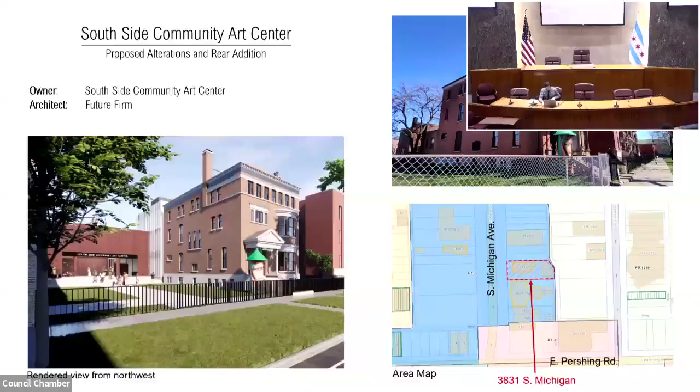The Seaverns family only owned the property for a few years. It then changed hands a number of times. It was acquired by the SSCAC organization in 1940, which did not have facilities of its own until that point. The mansion was adapted for the Art Center as part of a Works Progress Administration initiative that established many such art centers around the country near the end of the Great Depression. This is the only one of these art centers that is still active today.

During the 1940 conversion, a portion of the main building's interior was renovated by Hin Bredendieck and Nathan Lerner, two students of Laszlo Moholy-Nagy, director of the short-lived New Bauhaus Design School in Chicago. The first-floor gallery, now known as the Burroughs Gallery, the reception area, and the stairs connecting the first and second floors were part of this interior renovation and are the interior designated spaces. Their design was radical and forward-looking for its time. This was appropriate for the SSCAC, as it was one of the first arts institutions to host exhibitions and programming for artists of all racial and economic backgrounds together, at a time when the rest of the art world was still largely segregated.

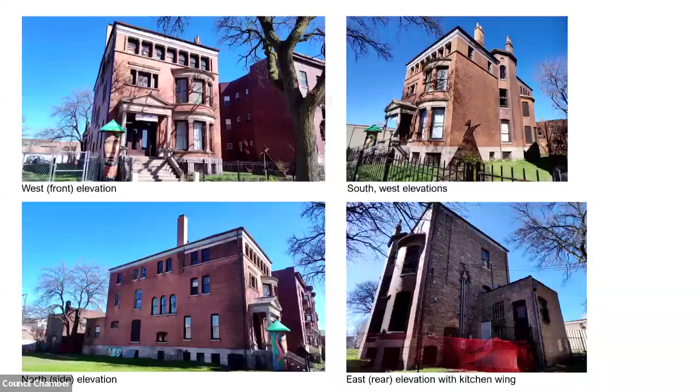All elevations and roof lines of the building are significant features of the exterior, which mostly retains its original 1892 appearance. The building is clad in face brick with a limestone base on the front and both side elevations, and has a hipped roof with little overhang. Limestone trim and classical details feature heavily on the front facade. A decorative pressed metal cornice ran around the entire perimeter of the roof, though at some point this was replaced with a simpler flat one.

On the north and south elevations, some windows have been covered. The windows at the first floor gallery were covered when it was converted in 1940, but the other non-historic infill is proposed to be removed.

At some locations, windows beneath the infill will be repaired and restored. Where windows are missing and at the lower level where they are deteriorated, they are proposed to be replaced. Details of the new metal cornice and replacement windows should be provided with the permit drawings. In addition, the roof is proposed to be replaced like for like, and tuck pointing and other masonry repairs are proposed at all elevations.

The Art Center is proposing significant interior alterations and an addition to the building, creating new galleries, meeting rooms, archives, support, and other spaces. MEP upgrades will allow the existing spaces to better conserve artwork and artifacts in the center's collection. A new rear addition is proposed for the rear of the site, outlined in red.

The designation ordinance covers the original boundary of the subject lot, highlighted here in blue. The two lots to the north of the property have been acquired by SSCAC and will be combined with the subject lot, allowing the addition to extend further north than the existing property line.

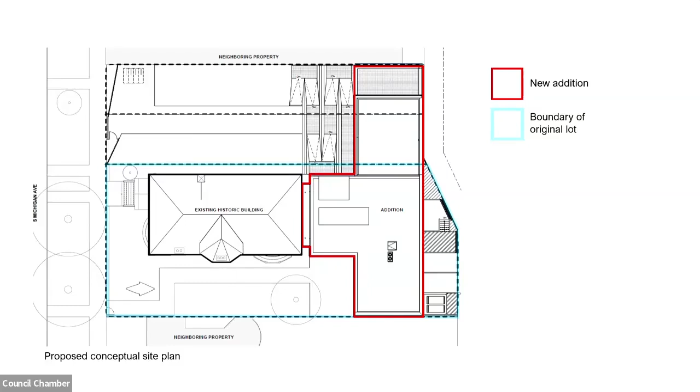The majority of the interior on the lower level, second and third floors is proposed to be demolished to allow reconfiguration of spaces. The designated interior spaces on the first floor, the gallery, reception area, and the two-story stair, will be preserved with some minor changes.

The existing coach house at the rear of the property is proposed to be demolished, which was reviewed and approved by the committee at the May 2024 meeting.

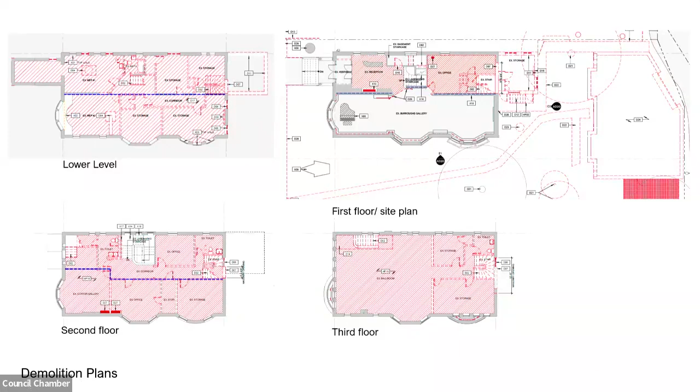On the interior, the first floor Burroughs Gallery and reception area are lined with the original pine paneling that was installed in 1940. The applicants believe the pine paneling was stained a darker color at some point and has not simply darkened with age. They propose to chemically remove the stain and use a lightening agent to lighten the wood. Tests of multiple agents are proposed to determine the best method for removing the stain and lightening the planks.

Because there's no documentation that the paneling was stained, staff recommends a test first to determine whether any stain can be removed. If stain cannot be removed and the wood has simply darkened over time, the paneling should not be chemically lightened.

The floor of the Burroughs Gallery and the stair treads and risers were painted at some point, and tile was installed over the original floor of the reception area. The tile and paint are proposed to be carefully removed and the wood flooring refinished and returned to its natural color. Neither the tile nor paint are historic, and the removal will restore the historic condition of the floors.

In these areas, if removal of the paint or tile reveals any flooring that is deteriorated beyond repair, it should be replaced with flooring matching the original in type, wood species, width of planks, and height of the finished floor.

As part of the renovation, additional insulation is proposed to be added to the exterior walls to increase the building's thermal performance, which will require the pine paneling to be temporarily removed in the process. The planks will be carefully numbered and cataloged so they can be reinstalled in the same locations and orientation.

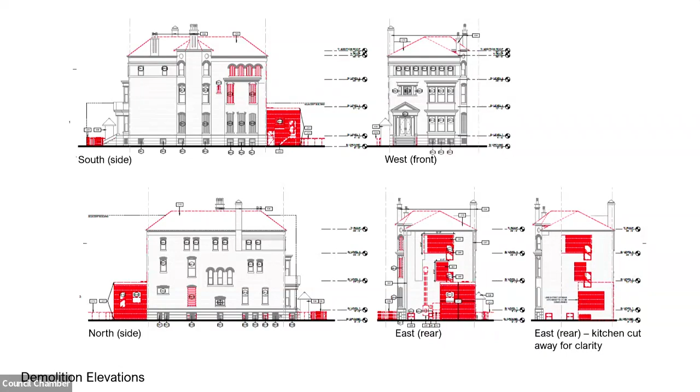At the rear elevation of the main building, where the new addition is proposed to attach, the small kitchen wing and some windows and areas of masonry are proposed to be demolished, as shown here in red.

The proposed new addition itself is located at the very back of the lot so that the main building is entirely in the foreground. The section of the proposed addition extending north of the main building is 2 stories and contains the new fully accessible main entrance, accessed by a combined ramp, stairs, and larger outdoor porch. The rest of the addition behind the main building and to the south is 3 stories in height.

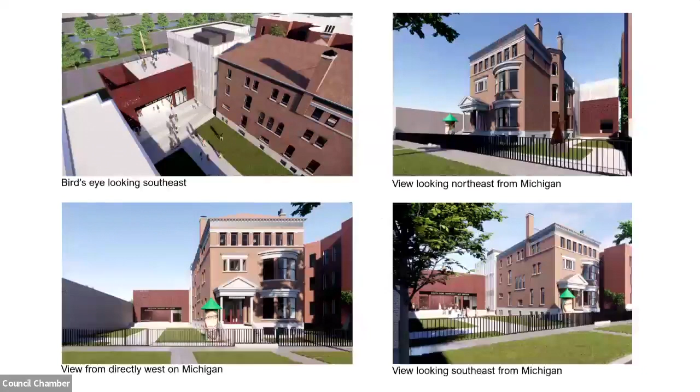The lower two-story portion of the addition is proposed to be clad in rain screen panels, and the three-story section immediately behind the main building clad in a glass curtain wall system. The south portion would be clad in a combination of both, with the panels at the first 2 stories and glazing above at the third.

The north porch at the entrance is a light-colored concrete, but an exact specification has not been made. A new simple metal fence is proposed along the front of the property.

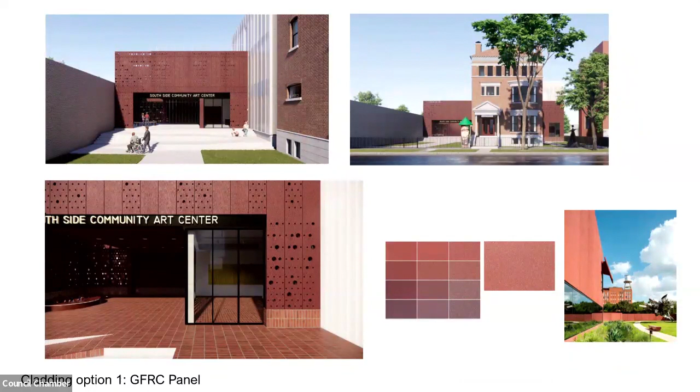At the portions of the addition that are to use the rain screen system, the cladding material has not yet been selected, pending confirmation of pricing, lead times, and other factors. However, it has been narrowed down to 3 options, one of which will be used.

One option is GFRC panels with perforations creating a pattern. The masonry-like material would complement the brick and limestone of the main building.

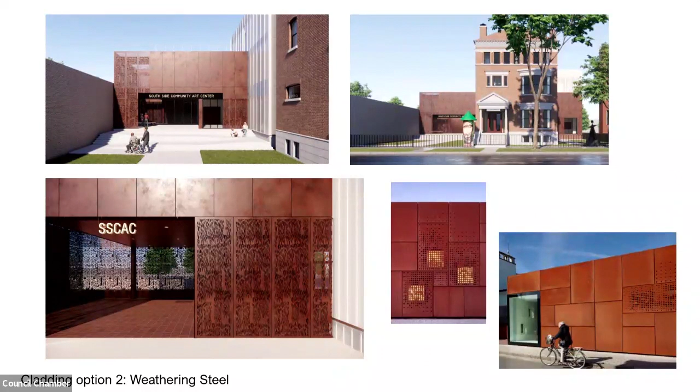Another option is weathering steel, also with a perforated pattern. This would stay within the palette of colors present on the main building and reference the pressed metal cornice.

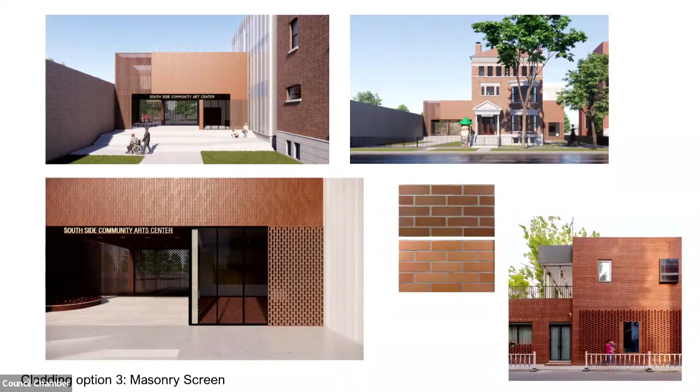The third option is a masonry screen composed of both solid and breeze block type units. This also has a direct reference to both the colors and masonry materials of the historic building.

Staff believes all 3 options are compatible with the historic building. Whichever one is ultimately selected, specifications and details should be provided on the permit drawings.

The curtain wall cladding a portion of the addition is proposed to be by Kawneer with captured vertical mullions that are proud of the glazing and expressed on the exterior. At the hyphen connection between the addition and historic building, the glazing is proposed to be clear vision glass.

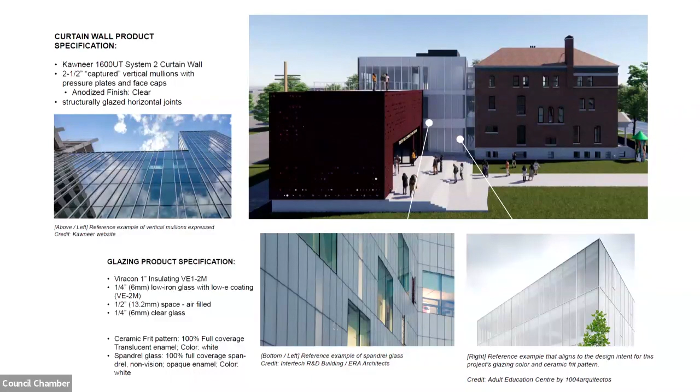At the remainder, the curtain wall would be semi-translucent frosted glass by Viracon. At the spandrels for each floor level, opaque white spandrel glass is proposed.

Staff recommends approval of the project as proposed with these conditions. Alderman Dowell has reviewed the proposal and has issued a letter of support. The applicants are here and available to answer your questions. We have the owner's representative, representatives of South Side Community Art Center, and the architect here.

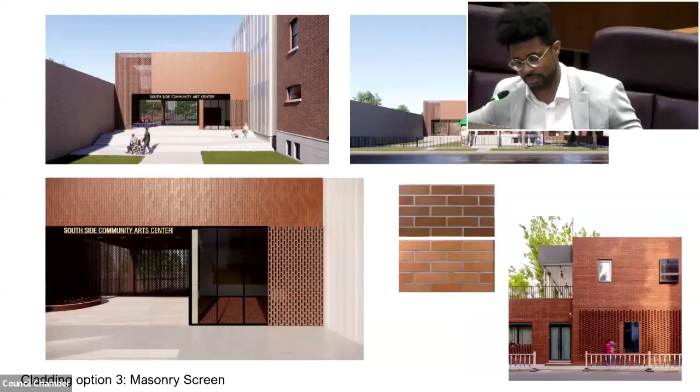So that's super tiny. I think what's interesting are the three options for the screen for the expansion. And I think, color palette wise, you guys have got it right on the head. I would imagine there's a lot of factors that will play into a final decision on that. But I would just encourage thinking of long-term maintainability. The only thing that jumped out to me is with the weathered steel, you've got everything that comes with weathered steel and what that may mean for the site. So I would offer that, but otherwise I think it's excellent work that's been done.

Good comment. I did have a couple of questions. One of them was regarding the interior panels at the ceiling, it goes up to the acoustical ceiling.

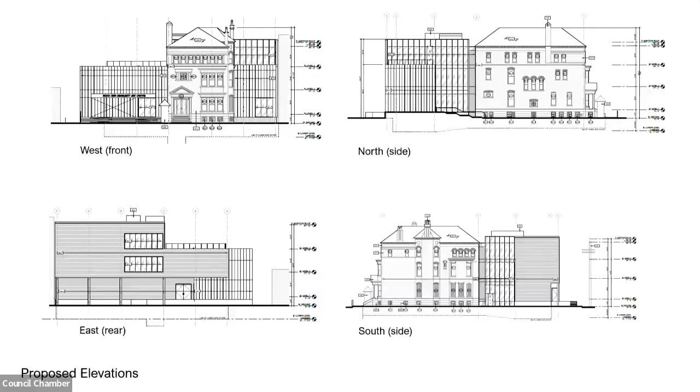Now that you're going to do this floating ceiling, how is that going to meet? Or, have you know, what's beyond the acoustical ceiling?

So we did some preliminary exploratory demo to understand what is above the non-historic ACT ceiling, and we see the exposed joist, so there's not another finished ceiling located above there. We're going to do a kind of cove detail between the drywall and the Burroughs Gallery panels in order to create a downlight around the perimeter of the gallery, which will reflect the original Bauhaus ceiling from the 40s renovation, but in a new material that I think will be more cleanable and more flexible for AV lighting and other gallery requirements.

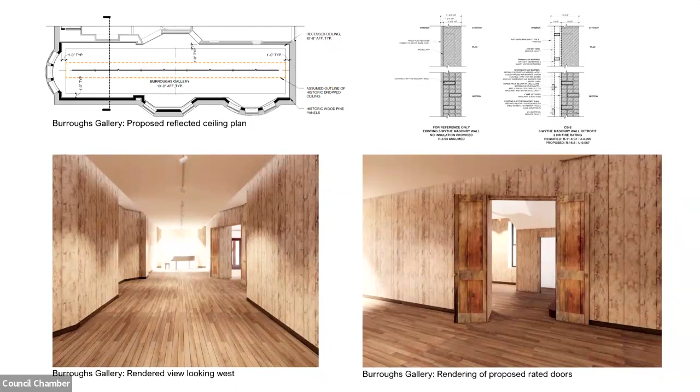Great, the second question I had was the schedule, you could talk about that. I can answer the question with regard to schedule, but if it's okay with you, I want to address the electrical outlet question first, because there's also a larger point at play that I failed to mention, so I apologize. Part of what we're doing here will also include significant environmental sustainability provisions as well as economic sustainability provisions.

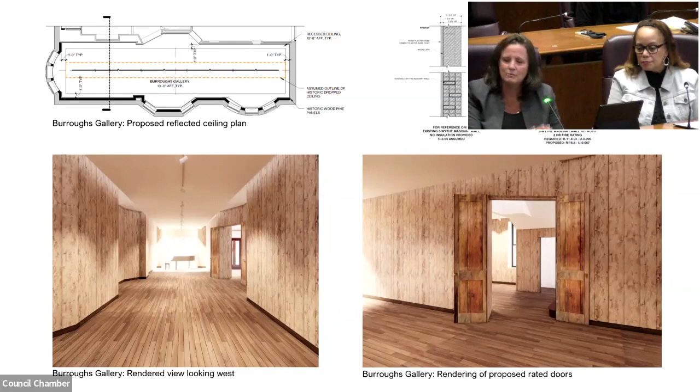The environmental sustainability provisions include a geothermal well system, and why we believe that's important is not only for the long-term operations of the facility, it also allows us to have unfettered ceiling heights and reduce the amount of ductwork that's going to go through the historic building. So as you're thinking about wire management and making sure we're concealing a lot of that, as it would potentially decrease the historic significance of something, we're thinking the same way mechanically.

I wanted to make sure to share that with you, Commissioner, because we're doing a lot of work with that. This is a project that has funding from community reinvestment, from DCEO, from the Illinois Arts Council, and ComEd has committed to some funding as well. So we're working through a number of those items, and that will ultimately determine the systems and final purchases.

Part of why you're being asked to allow us to continue to explore three facade options is specific to that funding and the fundraising. Monique and the entire board have done a remarkable job in garnering the funding and continue to bolster that funding, so we're really hopeful we can continue to push and afford more and more.

But one of the bigger schedule implications is that one of our grants does sunset, and it's over $2 million. So our schedule has, I wouldn't say complicated, but a nonlinear approach to it. So forgive me if I don't sound fully step-by-step.

But what we're doing right now is we've completed our design development package, we've had a cost estimate done by a third-party estimator, and we've begun discussions with all of the city departments as it relates to regulatory approvals - as I mentioned, fire department, MOPD and others, building department - so that we're well poised and don't lose the funding we've received from the Illinois Arts Council.

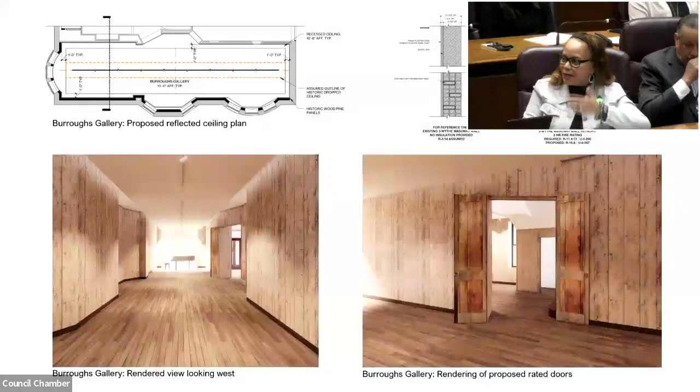So that's not only super exciting, and to the credit of the wonderful team at Future Firm, some of the pieces you asked about, the first three options, the idea was to somehow tie that historic information to the outside. So it won't necessarily be known when you first see it, but that was really kind of the concept.

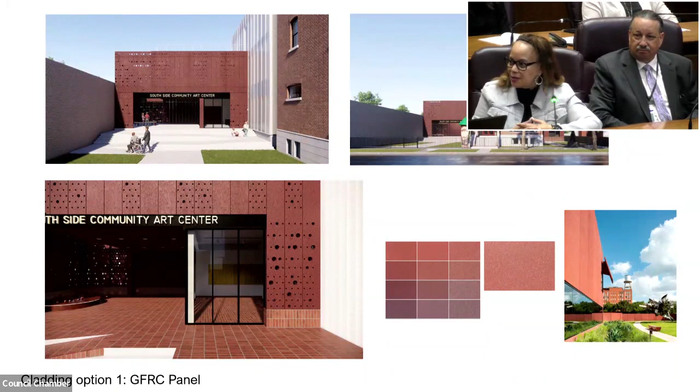And when Tyler mentioned, and everyone else has mentioned, just how much effort has been put into maintaining the cultural significance and the history, that's another component. I think we all got excited about that because telling that story, understanding all the artists who have come through those doors, and replicating that significance outside in some form or fashion was really exciting. So I wanted to mention that as we embark on choosing which of those three facades will work best for us.

I don't want to take up too much time, but I did see that note, and I know the process of exhibiting work and what that means for an artist is a science in itself. So, not to influence the final solution, but that definitely helps sell the GFRC for that. So, kudos again.

Worth saying we're looking at the custom full perforation also in the weathering steel as well. So the rendering you saw was an early study where we were looking at etchings by Margaret Burroughs, but we do think the hole pattern, which really resonates, as Monique mentioned, with the history of the institution, would also be applied in the weathering steel system.

Commissioner Hughes? Yes, first and foremost, I absolutely love this building. We live very close by, and I'm excited to take my little one to visit someday soon.

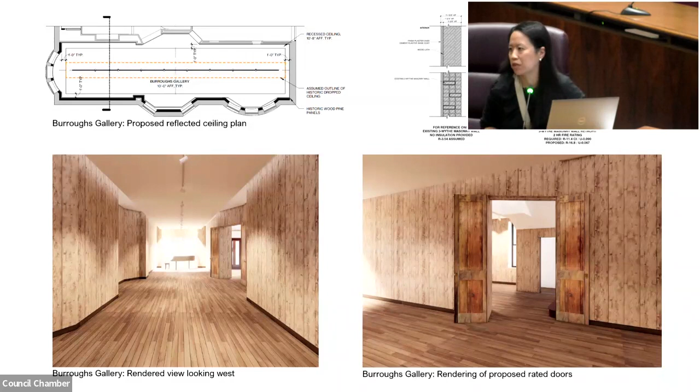Perfect, I'm super excited. I also think the rendering of the three different facades, and the courtyard that's in front of it, also seems like a really exciting space that I'm excited for. I can imagine our children and our community having a camaraderie moment in that space, and I look forward to the finish line of this and getting out to support some more.

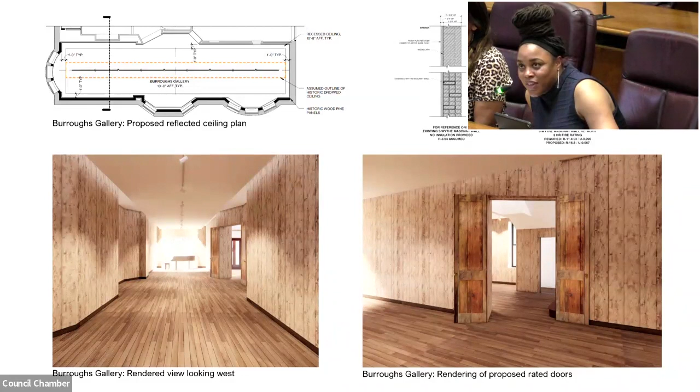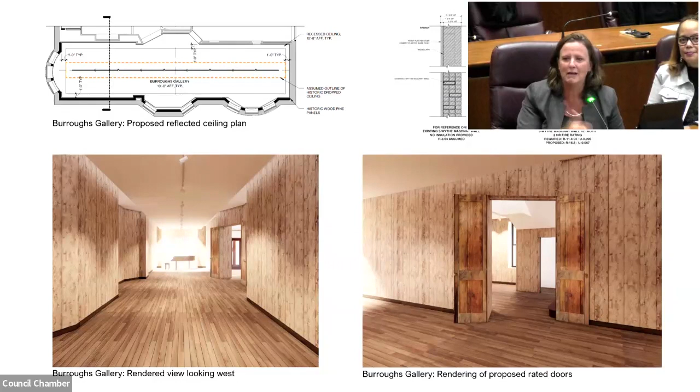Because that makes me really excited too. We've really ideated a lot around that convening space and the ability for the addition to serve not only as this amazing place that will have elevators and access, but humidity control for art storage for the very first time in the center's history. But part of how that addition is laid out allows for an open platform for spoken word assemblies or any kind of presentation or sculptural exhibitions that are sort of outside and inside. And so it's a place that excites the entire team.

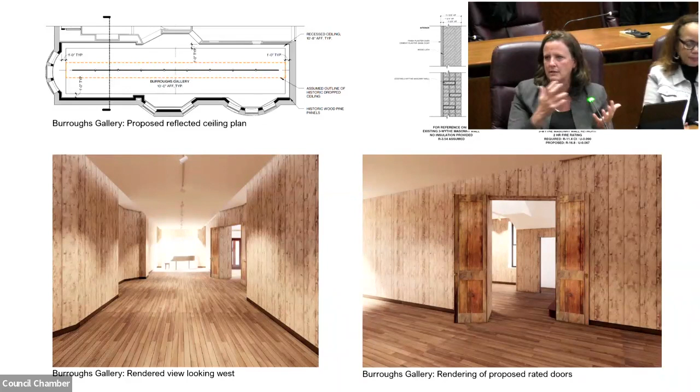And Monique and her whole team have been so embracing of all the ideas and have allowed us to explore a space of convening, and that space is extremely special. So thank you for recognizing that. And then finally, I would add that we've been very deliberate as a team to make sure that we embrace all of the new, but we maintain the heart and the significance of the original space, and that we honor the ancestors in different spaces, that we have a space outside. We haven't finalized different art pieces that may or may not go out there, but we are very focused on making sure that it's a true community space.

And it not only offers things to the community, and as Bronzeville continues to grow and be a viable resource, and now it's been named a cultural district, we want to be an important component of that. So I'm super excited.

You mentioned the Burroughs Gallery, the light will certainly, when I saw the photos of the original panels I was kind of like, okay, what happened? But I think the lighting is going to be clearly important, especially for us as we move forward with exhibitions. There's a uniqueness of having work hung on the wood panels, but there's also an important component to having lights that actually really showcase the art in a way that people can see it and appreciate it more.

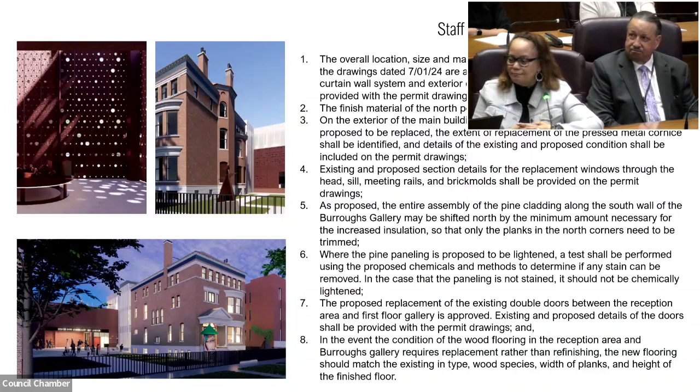Just one real quick thing. I assume that there are no zoning changes? No, that's correct. We met and requested a review of that, and we're as of right.

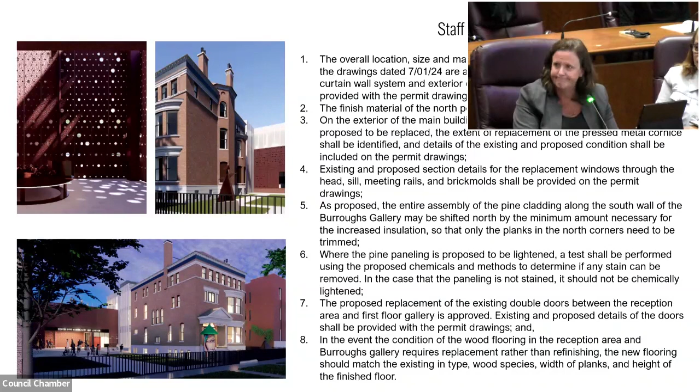Fantastic. Last thing, you have a wonderful opportunity with that fence across the front. Get that right. Thank you. That's all I have.

Anybody else? Okay. All right. Nobody signed up for public comment. Nobody's here. Okay.

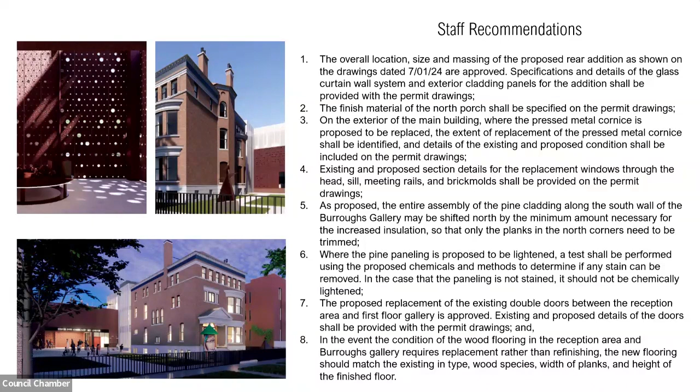With that, I'd like to note that the committee's authority is bound by the landmarks ordinance, and the committee's decision on this matter is based on criteria outlined in the ordinance and the commission's guidelines. And so I'd like to call on or request a motion to adopt the staff recommendation for this project.

And second by Commissioner Fair, Commissioner Ponce. And I am recusing myself from this vote. But the motion carries unanimously. Okay, congratulations. Thank you.

Next item on the agenda is the property located at 2323 to 2325 North Cambridge in the Mid-North District. This is a proposed construction of 2 rows of 3-story masonry townhouses, each containing 8 units. And Tyler, you're on again.

Waiting 1 second. Yeah. Folks, okay.

The subject properties are a portion of a group of 9 vacant lots that make up the site of the former complex for the Cenacle Sisters of Chicago, which was determined to be non-contributing to the Mid-North District by the Commission in June 2021 and were demolished soon after.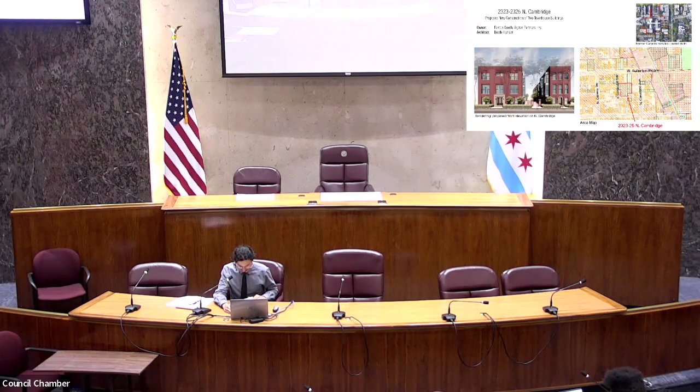The site for this proposal is at the south end of these lots, with frontage on North Cambridge to the south and west, proposed shared private drive to the north, and property lines shared with the rear of the adjacent properties to the east along North Cleveland.

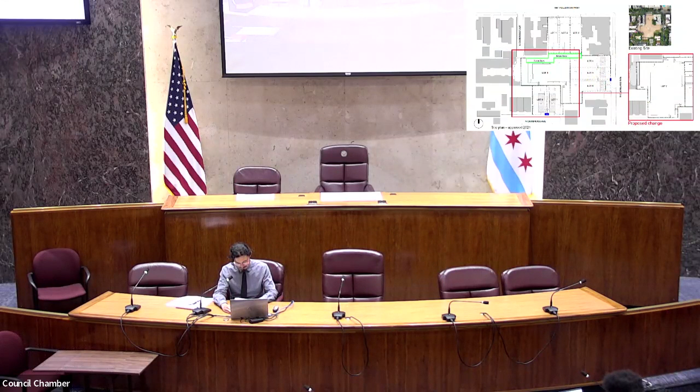The previous site plan for the properties was approved by this committee in 2021. This proposal would modify the previous site plan to combine lots 7, 8, and 9 shown here into one larger lot as shown to the right.

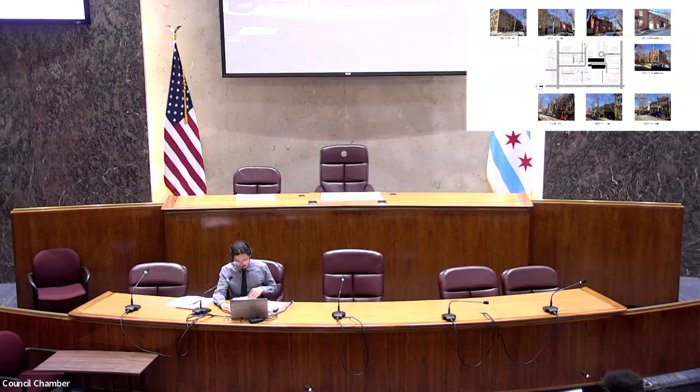The immediate context along North Cambridge includes a variety of buildings of different styles and scales. The applicant is proposing 2 new rows of townhouses, each 3 stories in height and containing 8 dwelling units. Because of the unique interruption of the typical street grid in this location, only the south elevation of each row has frontage on a public way. The south end walls of the proposed townhouses therefore make up the primary facade as viewed from the street.

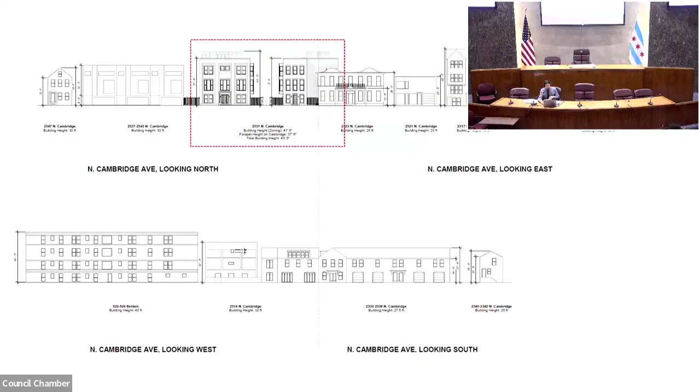The applicant is proposing, oh, sorry. The 2 rows of townhouses are arranged on either side of a shared court that provides vehicle access to the garage for 12 of the units. The remainder have garage doors facing the alley or the private drive.

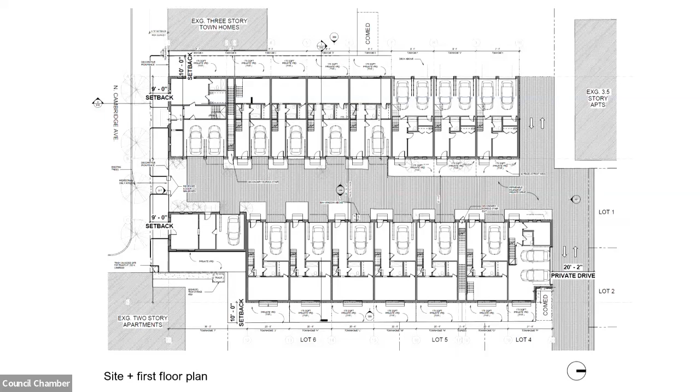Access from the street at the south is for pedestrians only, and no new curb cuts on the street are proposed. The south setback at the street matches the setback of the neighboring building, maintaining the existing predominant setback on Cambridge.

The east and west elevations are the front facades as viewed from within the shared court, but are only visible as secondary elevations viewed from Cambridge to the south. There is some variation in the overall arrangement of the doors and windows between units, but each unit contains an entrance door with a stoop 12 inches above grade.

For all the units, a metal-clad bay containing 5 windows projects from the 2nd and 3rd floors. The bays have modern detailing but are overall reminiscent of historic metal-clad bays located throughout the district. The parapet that forms the guard for the deck at the roof level is capped with a thin metal coping. These elevations are secondary as viewed from the street, but staff recommends that they are overall compatible with the district in form and proportion.

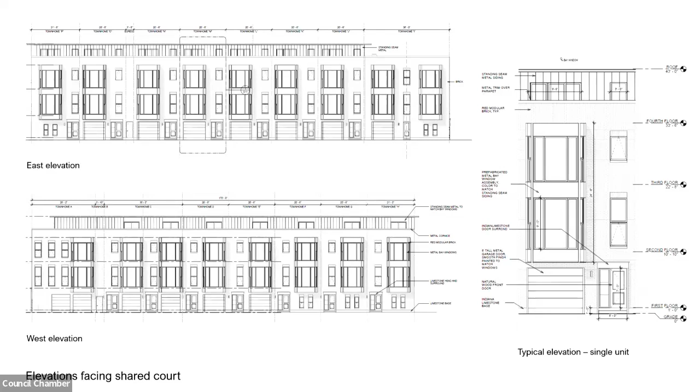The west building at the south elevation is symmetrical on the front facade, with a set of 2 gang windows and punched masonry openings at the ground level on either side of the entrance. The 2nd story has 3 identical window bays, each with a center picture window and tall double hung style windows, flanking either side, like a typical Chicago window.

The 3rd story has sets of double hung style windows on either side and a smaller set of square windows in the center. Vertical frames of inset masonry around the windows and center entrance extend up 3 stories, emphasizing the verticality of the building.

The design is simple and in keeping with the proportions and detailing of historic masonry buildings in the district. The east building is the same height but appears narrower as part of it is tucked behind the adjacent building. It also has a center entrance with a short stoop and the same arrangement of window openings. However, each is simply 1 double hung style window in a punched masonry opening. Like the west building, this facade is also simple but compatible with the styles and themes of the landmark district.

Enlarged section details of the proposed windows were not provided. These details, along with enlarged elevations of the entrance and garage doors, should be provided with the permit application.

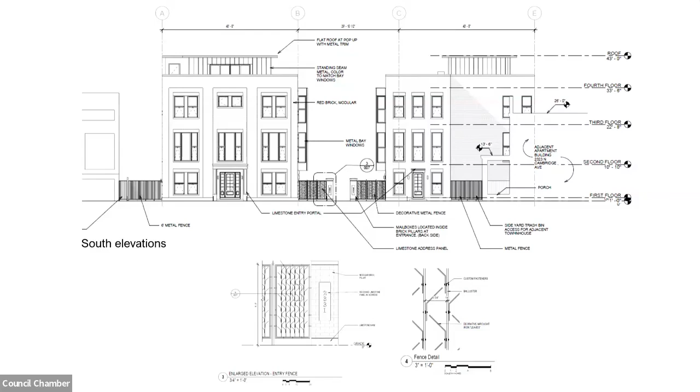Both buildings have a rooftop terrace and access penthouse. The provided renderings show the penthouse for the west building will be somewhat visible when viewed from the west on Cambridge, but it is set back far enough that the lower parapet is still perceived as the top of the building.

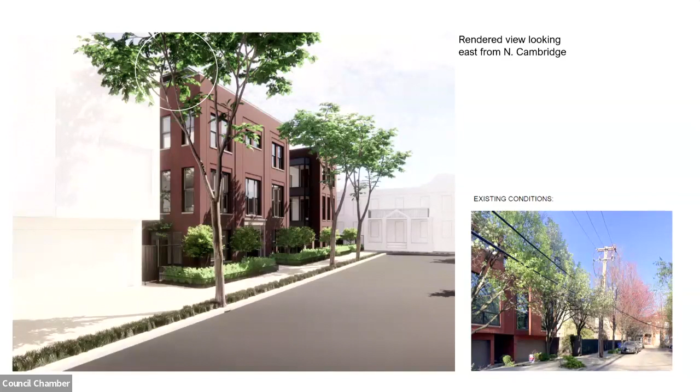The penthouse atop the east building is set back even further from the south and is not visible. This rendering shows the proposed development looking due east along the east-west oriented section of Cambridge.

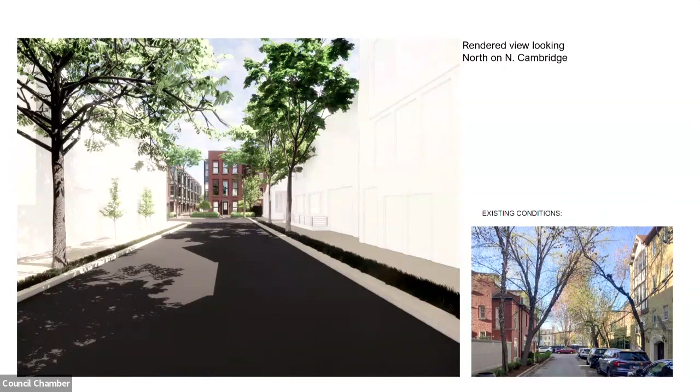Both buildings are proposed to be clad on all sides in a modular-sized red brick by Endicott in color ruby red with matching colored mortar. This brick is within the range of size, colors, and textures found within the district and is compatible.

The short stone base, windowsills, and stone flat arches over the south street-facing entrances are proposed to be buff-colored Indiana limestone. The standing seam siding for the rooftop penthouses is by Pac-Clad in color zinc, and the window bays are proposed to match this color.

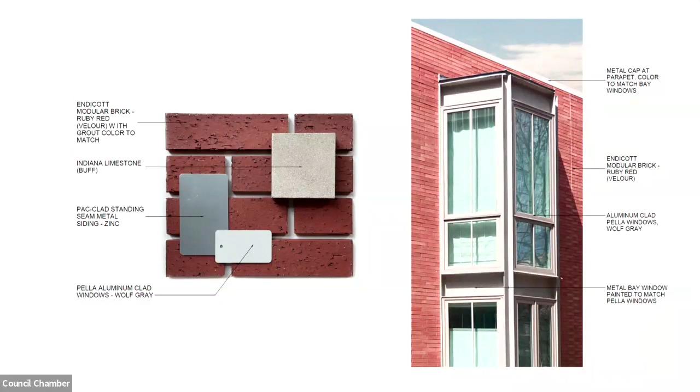The color for the metal parapet cap is not specified, but it should match the bays and metal siding. These materials and colors are all consistent with the materials and colors present in the district, and staff believes they are compatible.

Staff recommends approval of the project as proposed with these conditions. Alderman Knudsen and the Mid-North Association have both reviewed the proposal and have no objection. The applicants are here and available to answer your questions.

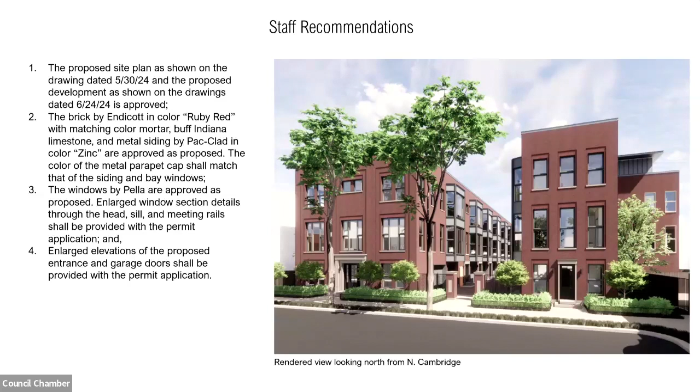Thank you, Tyler. Does the committee have any questions? Would the project team like to make a statement?

We mainly like to thank Tyler and DPD staff for their prompt review of this. This helps complete part of the Senecal redevelopment project, and now the project will have the 3 main types of residential housing: single family, townhomes, row houses from prior times, and multifamily within this property fitting into the Mid-North. We've worked with the neighbors, we've worked with staff, we've worked with the Alderman's office in bringing this project together, and look forward to your favorable review.

Thank you, Rolanda. No other questions? I did have one real quick question on Cambridge.

The existing conditions has those overhead wires. Are those being intended to be buried, or what's going to happen with those? On Cambridge, if you go back to the rendering, East-West Cambridge, yeah, right in there, existing condition photo.

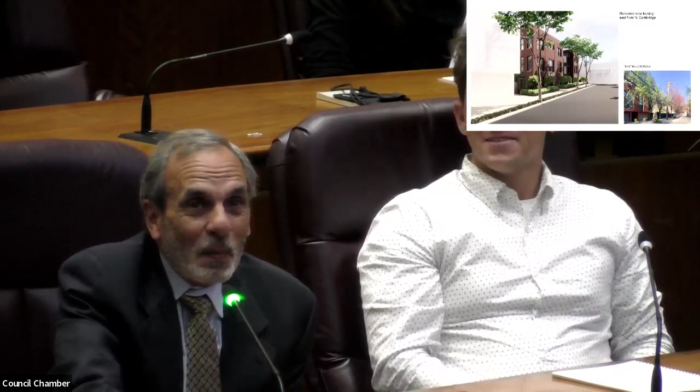Yeah, I mean, that's a bit of a monumental task for us to do. But hopefully someone will, or ComEd will, at some point bury it. Just check. Mark, you gonna take care of that? Okay, all right, thanks, that's all I had.

Any other questions, comments? Nope, not any. Okay, nobody signed up for public comments.

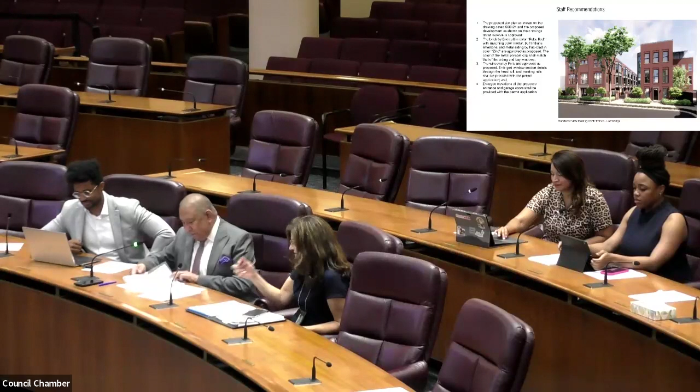Any further discussion? I'd like to request a motion to adopt the staff recommendation. Is there a motion? So moved, Commissioner Fair. Second, Commissioner Ponce. Commissioner Hughes.

Yes, and I'm a yes as well. The motion carries unanimously. Congratulations. Thank you, go forward.

Thank you, folks. Next item on the agenda is located at 4730 North Sheridan Road, in the 46th Ward in the Uptown Square District. This is a proposed 20-foot wide by 5'7" high illuminated marquee with a 2-line track reader board.

The subject property is a 2-story masonry building designed by architect Ralph Campbell Harris in 1914, located on the eastern end of the Uptown Square District. The building was previously occupied by a youth and family social service agency, and the current owner is CircEsteem, a nonprofit organization whose mission is to unite youth across all backgrounds and identities by fostering self-esteem and mutual respect through the practice and performance of circus arts.

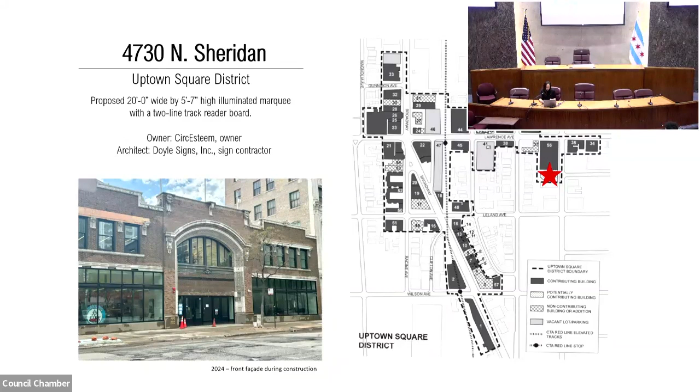Renovations have been made to transform the space to provide performance art spaces on the first floor and administration functions on the second floor. This work was previously reviewed and approved at the staff level, and the applicant now would like to install a sign above the entrance. Since the sign is over 100 square feet, it requires city council order, which triggers review by the permit review committee.

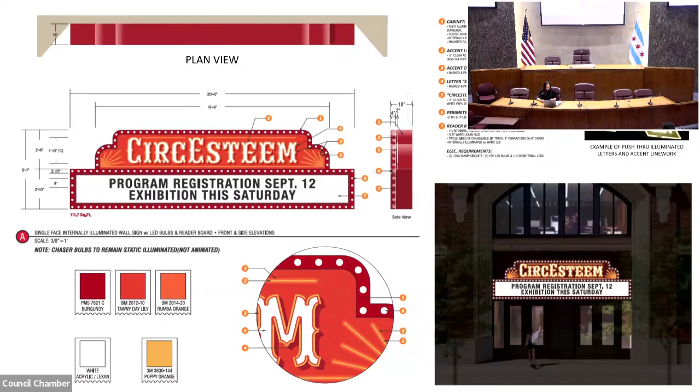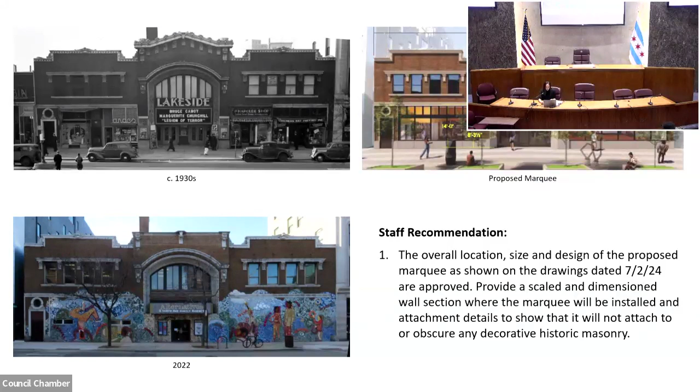Letter shadowing will be painted and with push-through illuminated accent line work. Bulb lights will line the perimeter and will remain static illuminated. The location and size of the proposed new marquee is based on the historic marquee that was installed in the building when it was the Lakeside Theater, as shown in the historic photo at top left.

The historic sign was removed sometime in the past, and a large mosaic sign and mural that was installed by the previous owner in 2006, prior to the district designation, shown in the photo at bottom left, was removed last year, and the masonry facade has been renovated. The overall form, width, and projection of the proposed new marquee is similar to the historic marquee. There are other theaters within the district that have large marquee signs, and this is in keeping with the character and scale of the building.

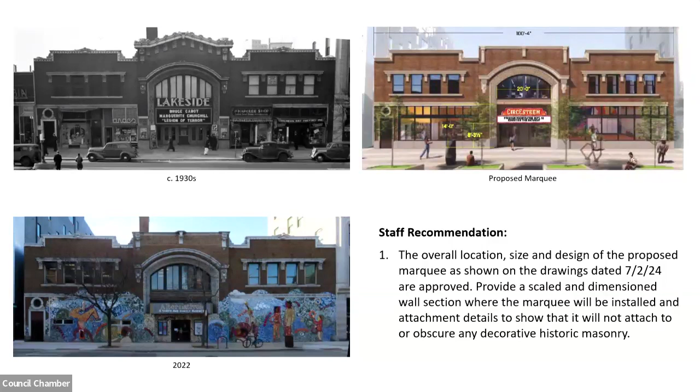Staff recommends that installing a marquee on this facade is appropriate for the building, and the design is reflective of the building's intended use for the circus arts. Staff recommends the applicant submit a scaled and dimensioned wall section showing existing conditions where the marquee will be installed, and attachment details should show that it will not attach to or obscure any decorative historic masonry. The Alderman's office and the community group have been made aware of the proposal, and that concludes my presentation. Unfortunately, I don't have any representatives from ownership or the sign contractor here today, so please let me know if you have any questions.

Commissioner: Just a quick question, there's no impact to the entry vestibule, the storefront, that we know of? Joyce: No impact. It's going to be below the stone band that you see below the second floor window, so it won't cover any of that ornamental stonework, and it'll be right above that storefront entrance.

Commissioner: Are they aligning the attachments to be the same proportion as the existing masonry? Joyce: Their goal is to be able to locate the attachment locations within the mortar joints of the brick behind. Another commissioner: I had the same question.

Okay, and the applicant is not here. Which ward is this in? 46th Ward. Okay, nobody signed up to speak on this either? Okay, I'd like to ask for a motion to adopt the staff recommendation for the project.